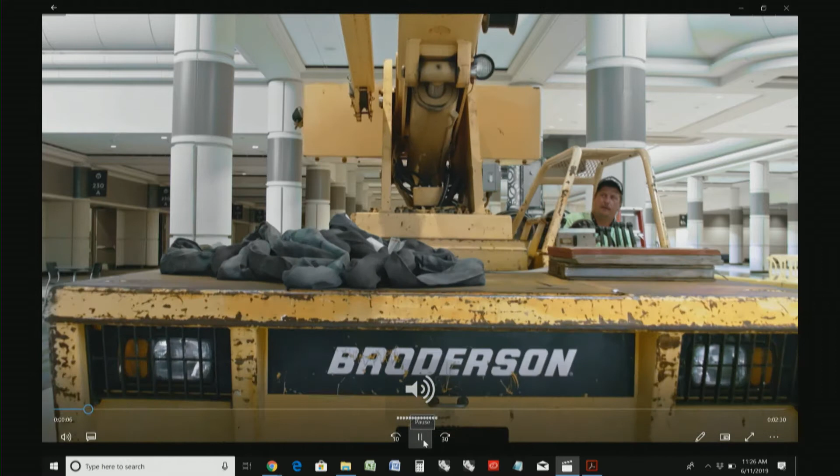A brick doesn't know its neighbor, it's just a brick. Can one know the next one, and get a chain? About 10 years ago, I thought, what if we actually look at the principle of monocoque, the principle of a boat, which is trying to transfer the force always along the surface and never go perpendicular to it. To describe something like that, we probably want to connect using what I would call tangential continuity. Linear parts describing a non-linear type of geometry.

It's more than a question for me, it's literally a fascination. The difference between intensive versus extensive curvature. What I would call extensive curvature is what has been presented before through the work of Frei Otto. That the bubble model is more performant than the box. He certainly proved it to us. But if you take a bubble and you scale it up to the scale of a room, up to the scale of a building, what looks like being double curved is actually planar at every single smaller description.

So intensive curvature is still trying to optimize double curvatures, but we fix a maximum radius, which means that instead of having one single surface spanning from one side of that room to the other, you have to go through tubular elements, you have to go through split, recombination, resplit, merging together, resplitting together, etc. It's thinner than your credit card, less than 1 millimeter thick aluminium, and yet you can stand on the top of a structure like that.

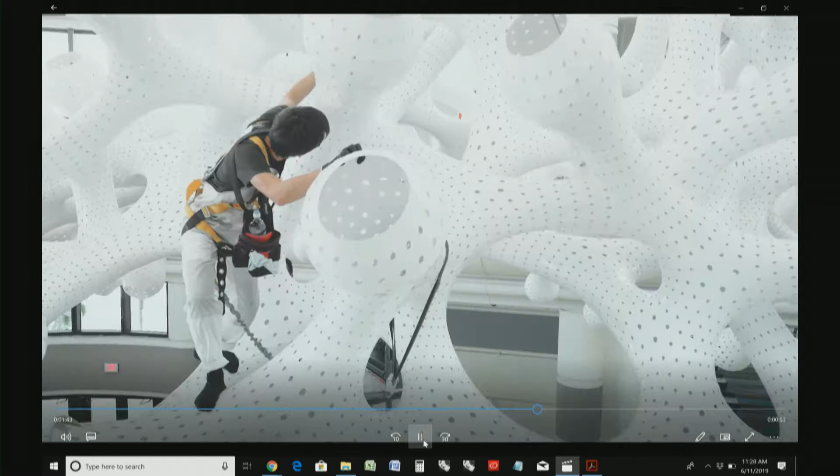It has depth, it has porosity. It's a limit, but it's not a limit. You start to wonder, is there an order? If there is an order, what exactly is that order? But also some people start to project their own background. You come from the sea, some people will read coral, some people will read flowers. It doesn't matter. But it matters that they engage, that they start to wonder about the structure. That's what's important for me in terms of architecture.

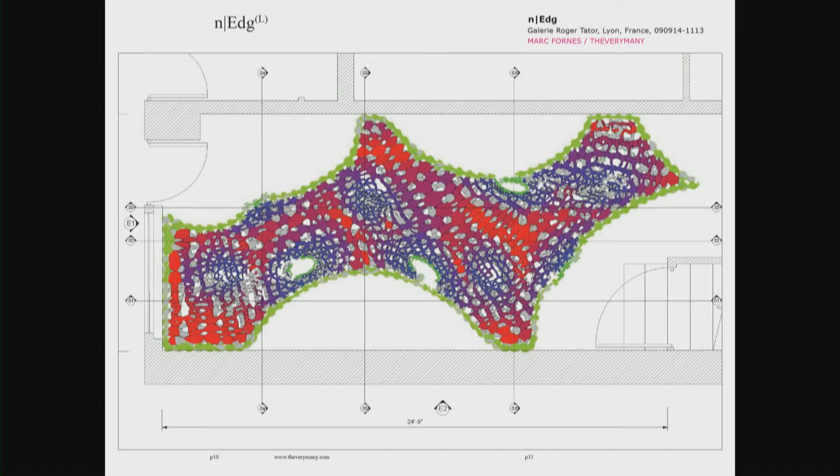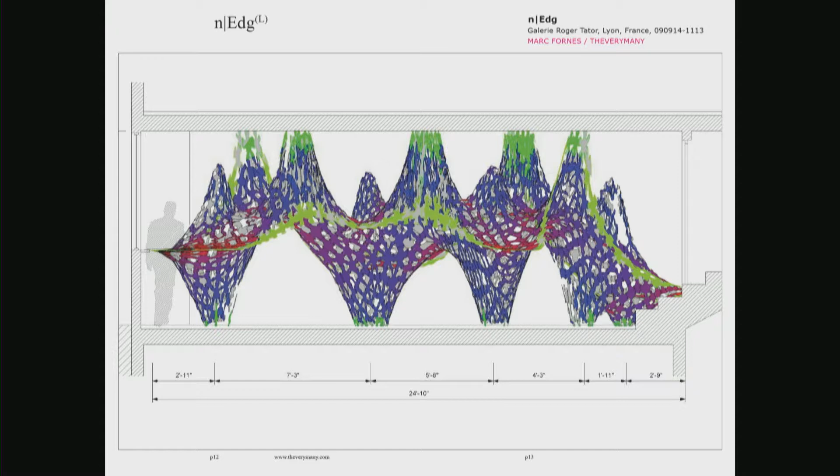2004-ish was the race of who could decompose the first one as a sum of quads. Of course, triangles, cutting them in some materials, are pretty expensive and deal with all sorts of problems of nodes. The quads came, and then the polygon came. That's actually one of the very first surfaces described as a sum of polygons. You take any kind of geometry, mesh surface, you can relax it, you can describe it as a set of panels, unroll them, nest them, digitally cut them, and eventually whatever is going to be your final form, you can reconstruct it. Those went through all sorts of series of installations at the time. We're talking about 2005, 2010. There was plenty of those.

The problem is, an installation like that, barely 2,000 parts, took about 10 days full-time, plus all series of helpers on the side. We knew directly the premise was probably wrong. The premise at the time was the very many. Can we describe complexities through the very many, each being unique, each being responsive to all sorts of criteria, structure, environment, name them, you can describe it. But we didn't know how to recompose that thing. And the name of the studio was misnamed. It's called Theverymany.

And actually, what we discovered from that is the next 10 years of the work had to address the opposite. How do you go from the very many to the very least? How can you reassemble as fast as possible those types of structures so you can eventually reach the scale of architecture? So you take a geometry like that, just a random one, non-linear, a series of branches, a mesh. Why is that non-linear? So that you can't just array panels onto it. The first little invention we made was the idea of, if we can't assemble 2,000 panels because it takes too long, what if we reduce the number? What if we start to recombine those panels into, let's say, a series of linear stripes, for example?

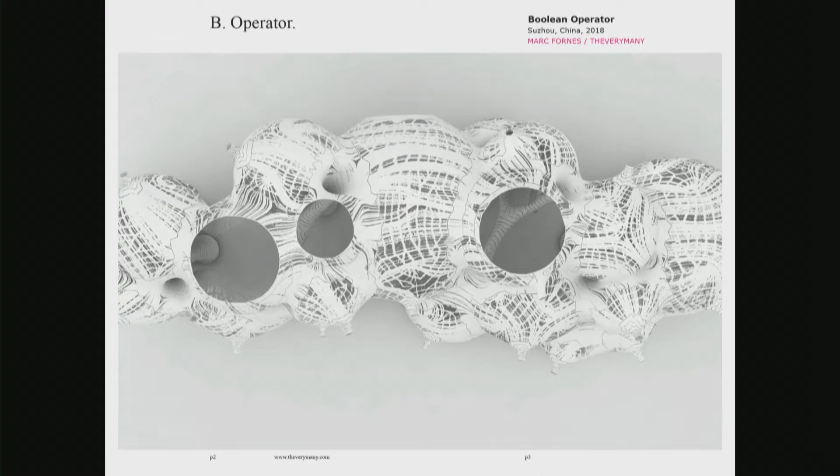You can see some of the moments. And a slightly larger one, similar type, in China, where the behavior was slightly different. One is following one direction of stress flow, and the other is following the other one. So the porosity is following one, and the parts themselves are following another. You can see some of the interiors, the kids climbing onto it. And again, that is 1.5 millimeters at the thickest. It goes from half a millimeter to 1.5 millimeters thick.

You can see the skin following the stress flow. You can see the two different directions, one for the cross members in the parts and one for the parts themselves on the skin, and expressed at night as a void, where obviously you see the opposite. Anyway, fun stuff, but temporary installations for most of them, except the hanging one. How do we keep growing? How do we become actually permanent, outdoor? How do we sustain much more than just dead load? Most installations are successful if they hold their dead load, but would dramatically fail as soon as a little bit of wind blows.

So we had a simple problem. We knew that we had to keep the material as thin as possible so we can still work it out. We can either bend it or fold it. So what we came up with is what we would call a structural shingle. The idea is pretty simple.

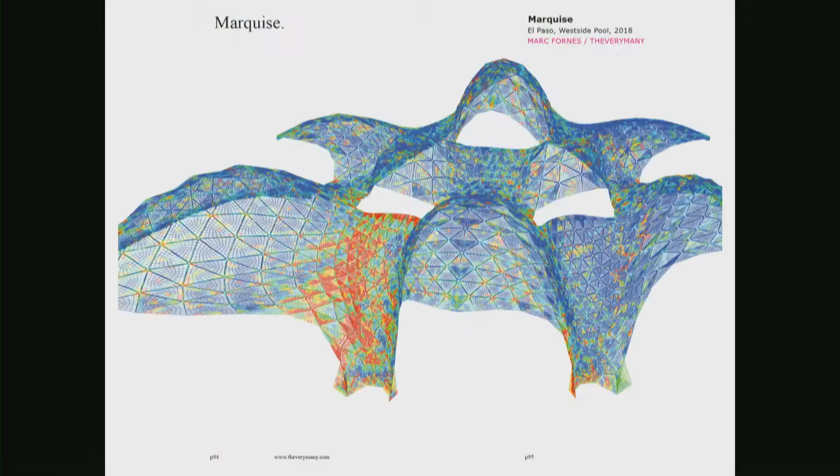Here you can start to see the tectonic aspect, the shadows on the ground as well, revealing all the tectonic, and a bit of inside. And a different one in El Paso, Texas, a project where we did an entrance for a swimming pool, similar type of idea. This one is 3 millimeter thick. It's a permanent outdoor project using the structural shingles.

As you can start to see, inside you see the stripe motif versus outside you actually read a typical shingle type. Inside, the stripes, the running bonds between the parts, versus outside the overlap in order to better resist impact. You can see the dynamic type of shadow onto the walls. Some of the coloration as well. Every part can be painted, of course, in one single color, so the sum of the parts creates all sorts of gradients, dark points, highlights, and the roof.

But still, we did end up with another problem. Now suddenly our shingles, in order to get produced, the parts themselves have to actually be bent, have to be folded. More processing on the parts equals the time you save on site, you lose it in the shop. So we thought, what if? We have all heard about bending active, of course. That idea of being able to produce a structure, for example, flat like Frei Otto, and push it up and lock it into place and then release all the scaffold and all the edge conditions.

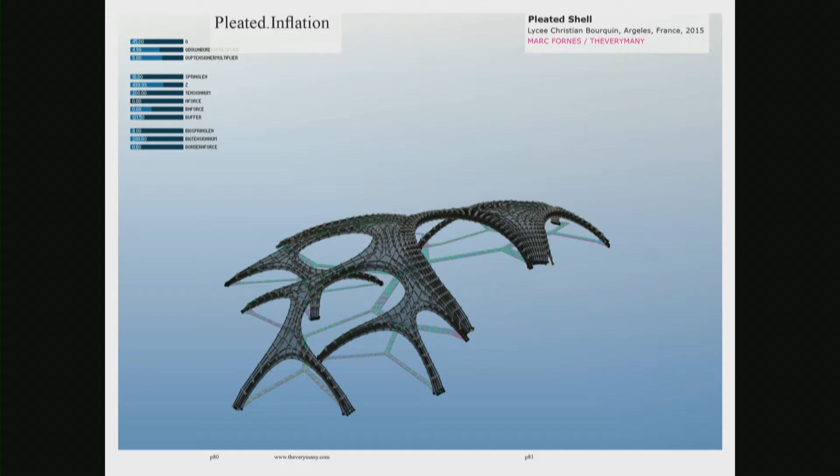So here is a bit of an earlier project where, in those cases, that's a more Frei Otto-esque type of process where the mesh can exist flat. Most of the projects which are non-linear, you cannot take the geometry and flatten it down, you would have all sorts of self-intersections. For example, a pleated inflation has 2 processes, inflation of the mesh, pleats of the mesh.

But here is what I wanted to show on that project, part of that progressive assembly. Not only is it progressive assembly, but you can also see here a charming lady who is assembling the piece itself. As you can see, there is only 1 scaffold here. There is absolutely no temporary mass to support anything. There is no mold present. She just has 1 rule. Every part, she needs to be able to carry the part on her own.

She arrives, she uses the piece itself as some way of self-scaffold, if you will. You can see her here. The only reason why we have the scaffold is in order for a person to come, climb it, feed her the part, and she would connect it. The reason also why it's different than a traditional vault: a vault would not sustain before you have the keystone.

Here it does sustain because each of our structures, despite being ultra thin, is actually always oversized. Oversized because wind drives, it's never the load that drives. So the load of a person climbing is nothing for a structure like that. This one is computed for 60 psf of wind. It's 3 millimeters thin as well.

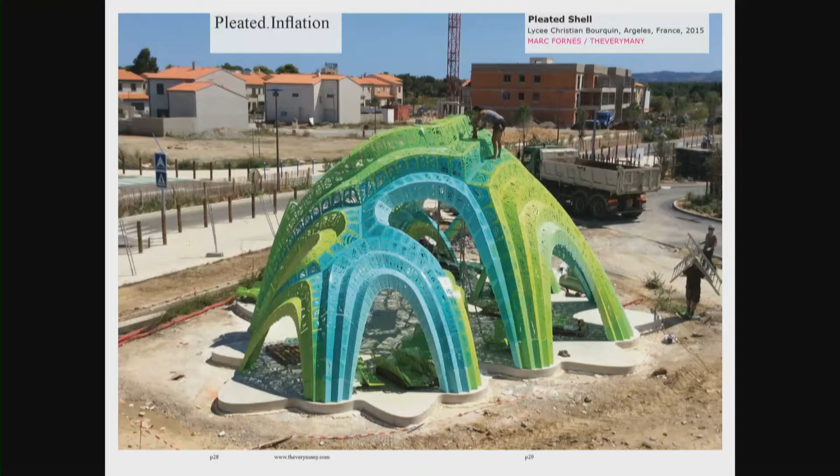Here you can also see the difference in terms of architecture for us, between the signal which is trying to trigger curiosity versus the experience. The experience is something to get people to come back. The idea is obviously to always have something else to discover, either a coloration somewhere you did not notice or the porosity.

Here too, for example, if you read the shadow on the ground, the shadows are actually driven by the structural analysis one-to-one. Nobody knows, and it doesn't matter, it's what we would call an urban legend. Only the nerdy would actually notice that, if ever, but most people will invent their own story about what the shadow means and would be very proud to share it with other people.

And the point loads. Point loads are part of the two projects I want to finish on. Point load is what kills any shell. Any shell finds it extremely hard to resist. If you focus all your load onto a shell structure, the membrane will perforate, unless you significantly overdimension your shell. So that's really a major problem.

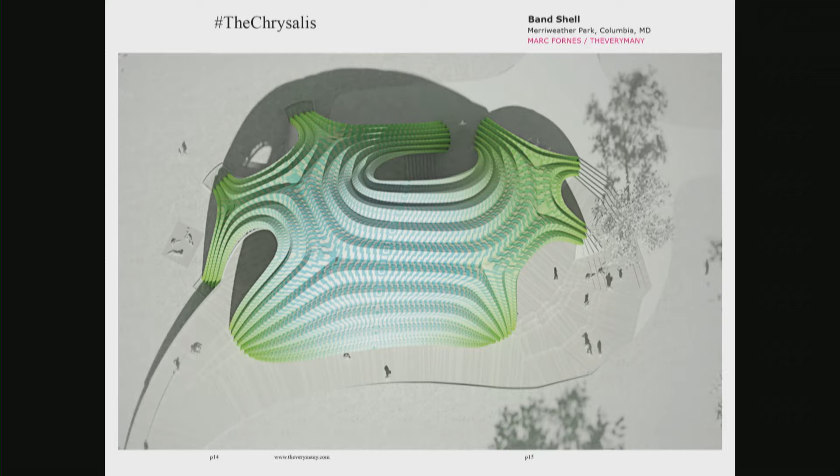And we won a small competition for an amphitheater in a park. Very proud of winning that one. I was also a youngster architect at the time. And we won it for one simple reason: the person who came to us said, you know, the problem is if I go and see an architect, he's going to try to force that to be a building. And he didn't know we were architects as well. But we won it because he told us one thing.

95% of the time, that amphitheater will be empty, not programmed. So we thought, that's his program, the main stage. But what if we try to make it as open, as multi-use as possible? So all those arches were not part of the program. We thought, what if every arch has a different type of function? We have stage B, for kids during a walk on a Sunday or a small classroom. We have an accessibility one, a dock one, the grand staircase, balconies, etc. Some of the structure.

But then we went for the geometry, and we started to actually pleat the geometry, started to actually be assigned an engineer, not of our choice. Somebody this morning was wishing to get the large firm, Arup, etc. In that case, we actually decided to even hire our own engineer to try to prove that the shell could hold, and it could hold definitely. But suddenly we ended up with that, and that's a structure calculated by Arup.

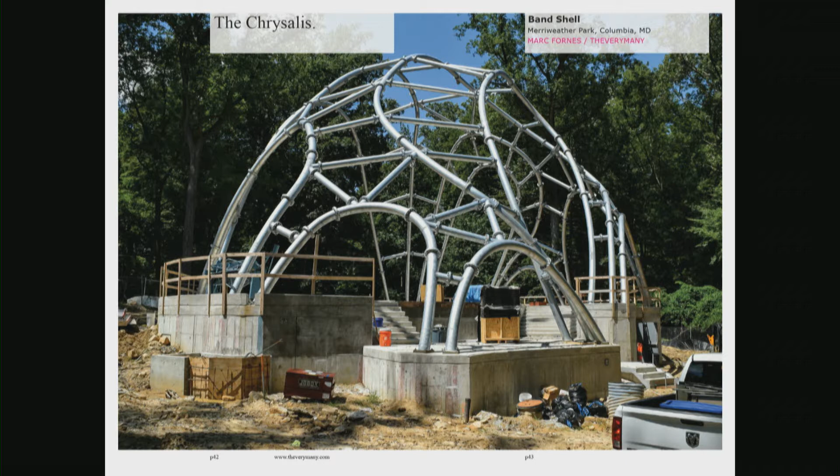So anyway, still an experience, still a project we like, but it brought us to a different client who came a little bit after the amphitheater. And interestingly enough, he had a strange problem. It's become very, very trendy in the US: every city now wants to break the typical typology of architecture, which is the parking plinth versus the high-rise on the top. So you're not allowed anymore in many of them to show either the cars or the lights of the parking. So most of them ask the architect, of course, to clad the typology before changing the typology.

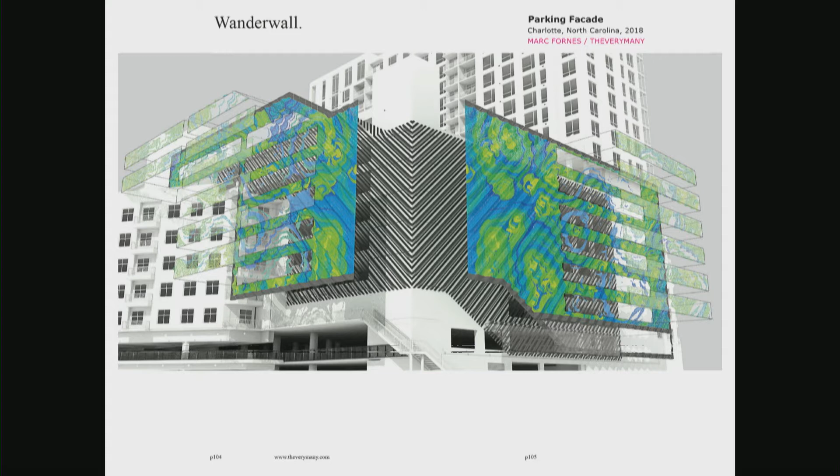Some of them start to ask for different types of creative in order to address some sort of permanent marketing elements onto the facade. But very quickly we arrived at an idea. We wanted something pretty dynamic on it, but we wanted to address one major issue we ran into when we started to talk to everybody about that facade: the reflex to panelize that facade. And by panel, I don't mean the single pixel. I mean one way or another finding some sort of grid, some sort of rational grid. And we wanted to go as far away from that as possible because we wanted to be continuous and dynamic.

So we finally came up with a motif which has a self-similarity of description. From far you can read, I'll let you read whatever you want to read into it. And little by little you can zoom, and there is a labyrinth within a labyrinth within a labyrinth following some sort of flow, up to maybe a part like that, for example. That's one of the parts composing the piece.

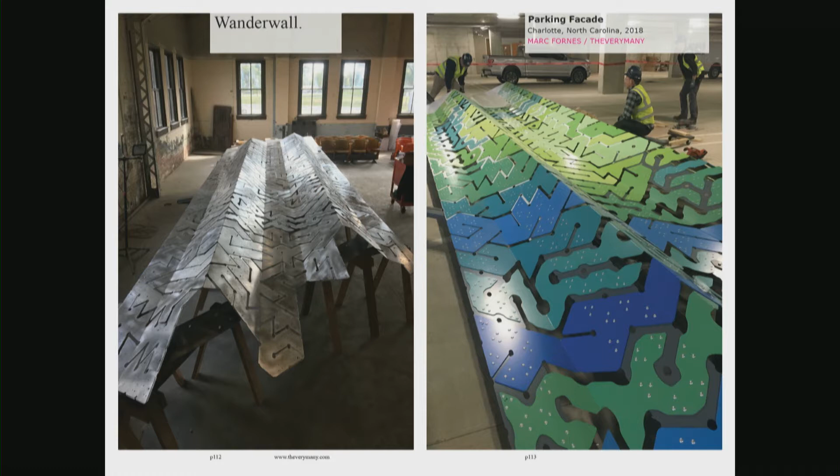And we started to approach a fabricator for the fabrication, but also an assembler. We managed to convince the fabricator, but the assembler again was resisting, was like, no, let's try to create panels. Let's try to use your system, a two-layer system, pleated to get the structural depth. Let's try to make them in panels. We came, did a mock-up, and they very quickly realized that there is no way on earth they would be able to come up with panels of that size and anchor them directly to the concrete of the parking.

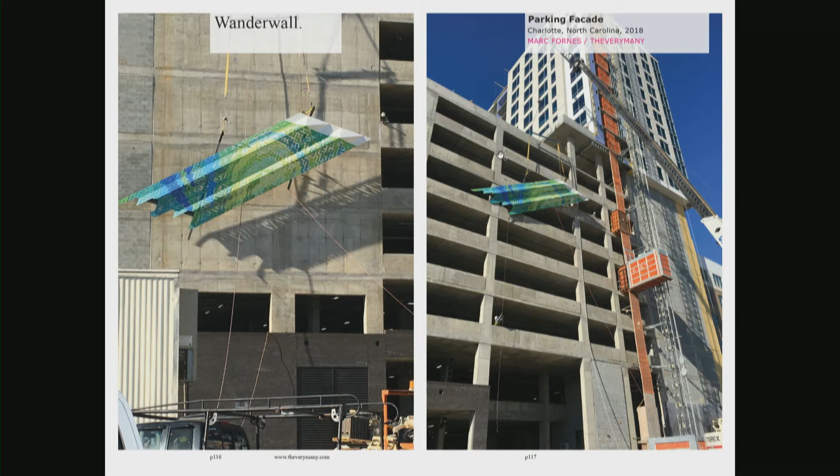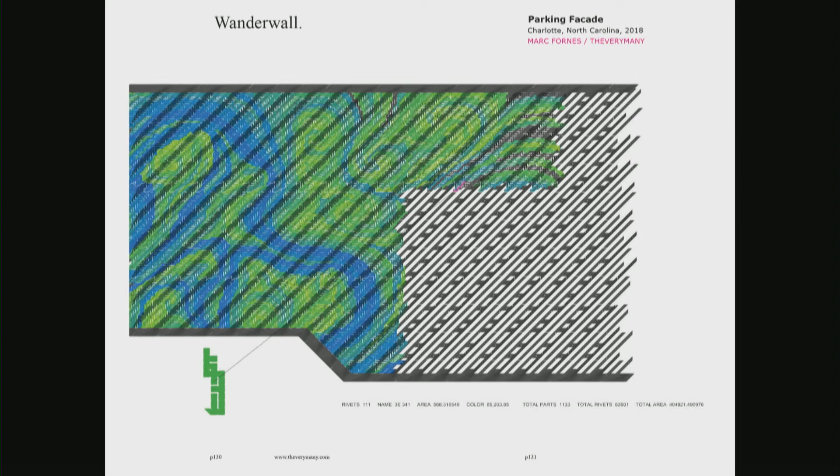So we went back to what we actually thought, and that's the beauty of having grown through those installations. A project like that is design-build. So you're suddenly not in a ménage à trois. The fabricator, the assembler is working for you, not for the client. So here is a simple sequence of assembly, simply walking onto the facade, the two layers. And basically, you can take a facade like that, which is just hung on a series of points. You can flip it 90 degrees, and it would sustain itself on a series of stilettos, for example. Here you can see some of the assembly.

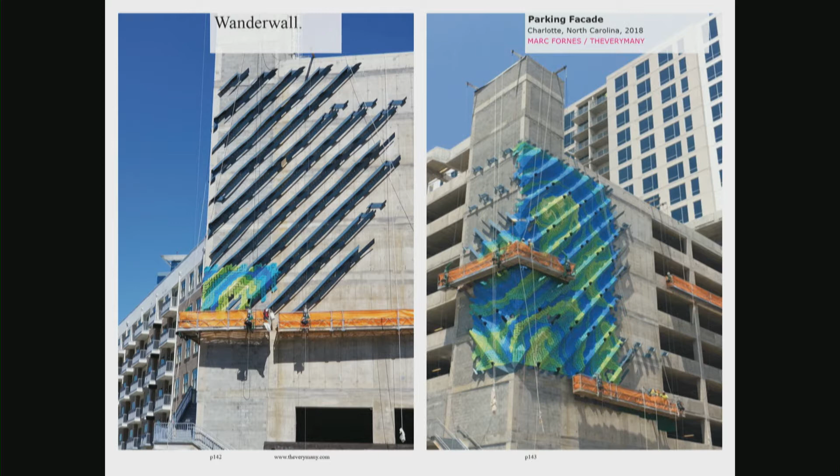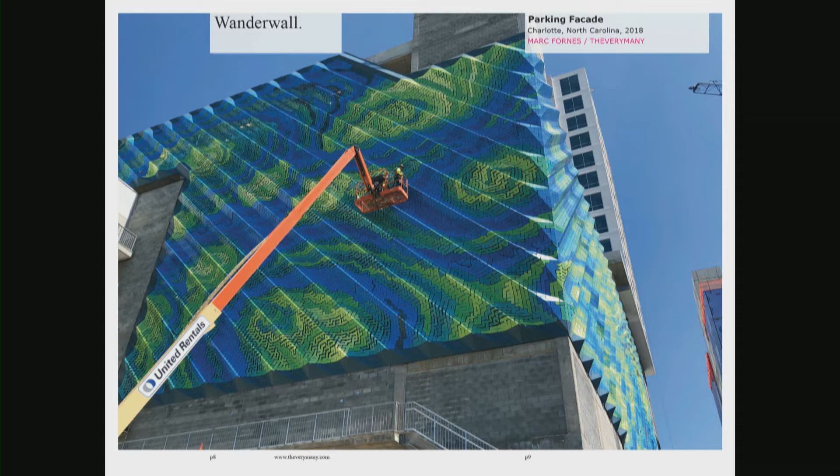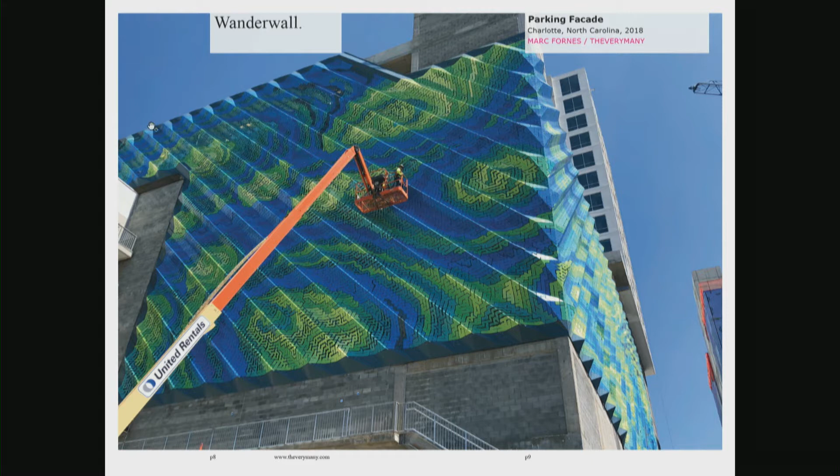Very simple. And just to give an idea of scale, obviously some sort of porosity, everything that a cladding has to provide. The pleat, so there is absolutely no primary structure other than the concrete, of course, no secondary system, and that's why we won the competition. We did not win it because of our scheme. We won it because they had planned more than $1 million just for the vertical fins to be able to anchor their facade on top of it. And we were able to eliminate that, take it into our budget, and with that budget, be able to afford the continuity of the motif itself.

So there is absolutely no breakage of the motif as per a traditional facade. You can see it from far. How it plays with the sun, sometimes a highlight on one side, sometimes on the other side. The corner condition, and some of the detail inside.

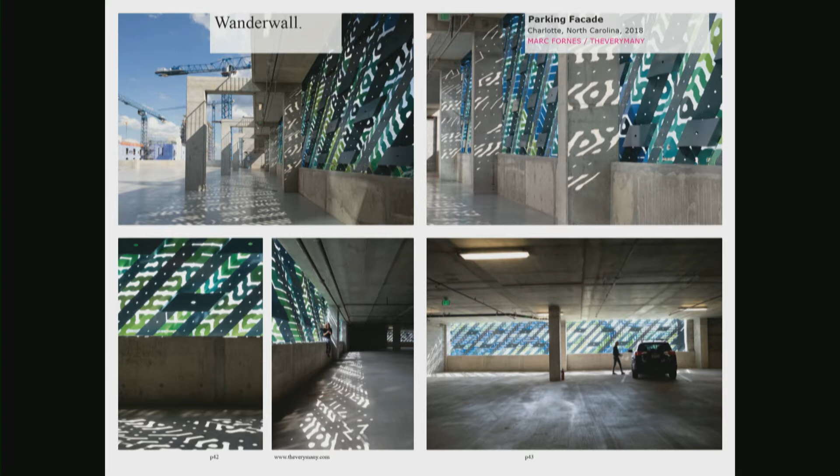But the last one, that's a very tiny one. I think I went very fast through it because I've been told I should expect 5 minutes left. All right. Perfect. It's just the last one, is what I would call freed form.

After having been doing that for now more than 15 years of building up, from that first proof of concept of a computational protocol that became little by little an installation, little by little permanent, little by little outdoor, we were so fascinated about the ability of producing at first. Then we were actually very fascinated by the ability to be structural because we needed to sustain. Now we start to compare what I would call freed forms, and there is a slight difference for us between free forms and freed forms.

Yes, it's a premise, but right now, you can do much better than that. You can be far more efficient. There is a new technology, just looking into the digital part first. We're still assembling that by hand. It's not anymore a DIY. Every project goes through a contractor, everything like that. So it does have to fit into an economical envelope.